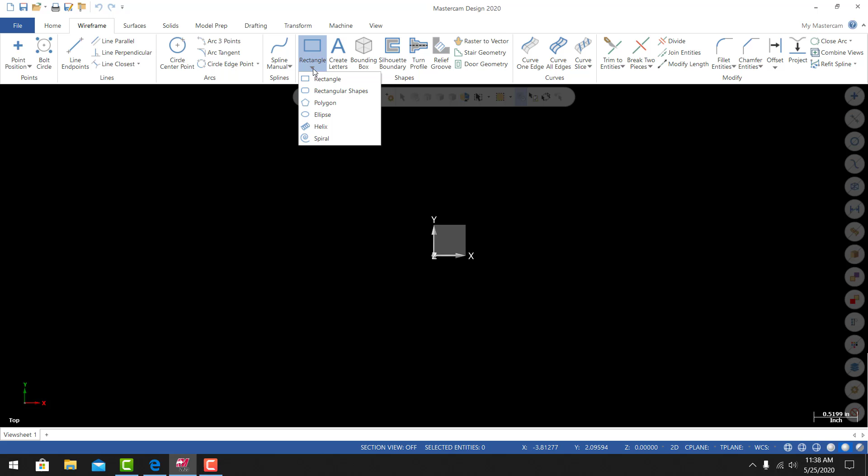I have a blank session of Mastercam opened up on my screen. We're going to create a basic shape that represents the outside profile of our part. If you look at the part, it has a rectangular shape that measures 6 inches by 1.88 inches. I'll start by creating a rectangular shape. So inside of Mastercam, I'll go to the wireframe tab. Under the rectangle tool, you'll find rectangular shapes.

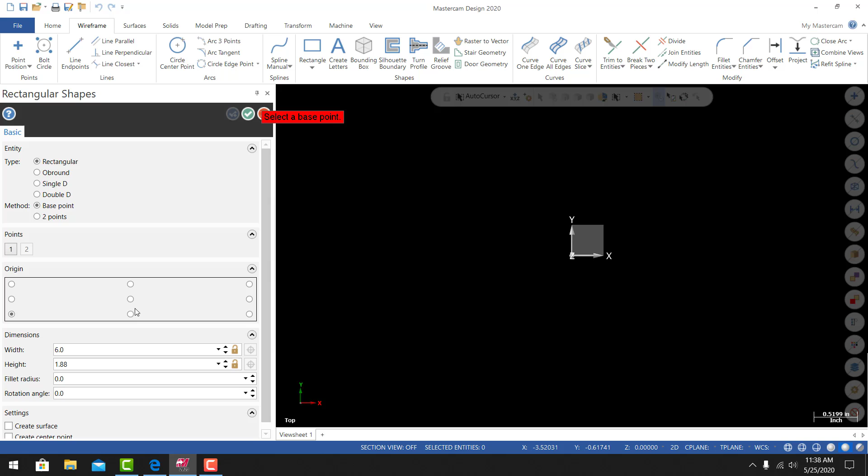For the width, I'll enter 6 inches. For the height, 1.88 inches. And I want the origin of the rectangle to be in the center. If I move my cursor to the graphics area, you'll see a preview of that rectangular shape on your screen. From here, I'll let my cursor lock on to the origin. Once I see it lock on, left click.

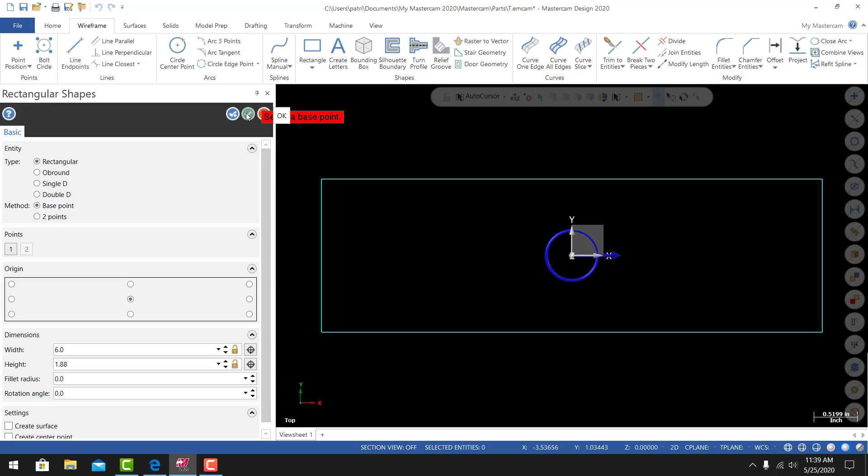You can see that the rectangle has been placed. This will be the only rectangle that I create using this tool. So from here, I'll go to the OK icon, select OK, and that finalizes the creation of the rectangular shape. From here, I'm going to draw in circles that represent the drilled and counterbored holes.

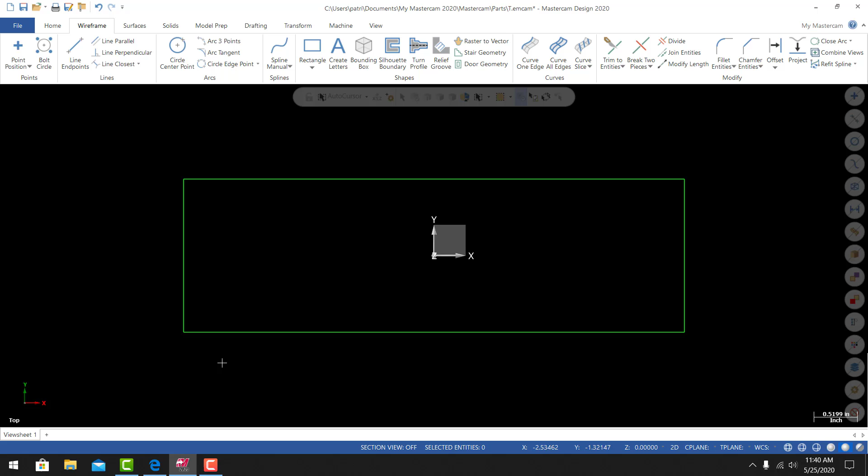To do that, inside of Mastercam, I'll go to Circle Center Point. It's asking me to enter the center point. Before I do that, I'll come over to the size field. In the diameter field, I'll type in 17 divided by 32, 17/32. To position this circle relative to the lower left corner, I will hold my Shift key down, position my cursor next to the lower left corner. Once I see it lock onto it, left click. You'll see axis controls appear on your screen.

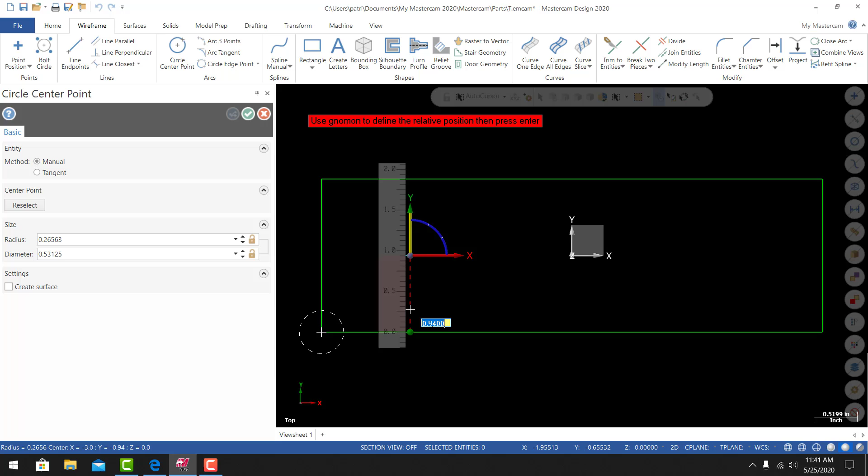To position it along the X-axis, I will hover over the X-axis control. You will see it highlight, and a field will pop up next to it. Here I'll type in 1.063. I hit enter once. I hit enter a second time. I can now hover over the Y-axis control. Once I see the field appear next to the cursor, I'll type in 0.94. Enter once, enter twice, and if I hit enter a third time, you will see that circle appear on my screen.

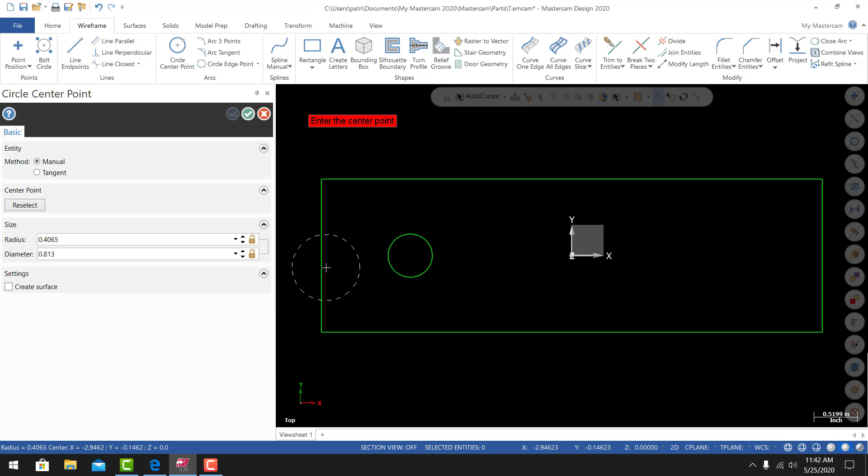From here, I want to create an additional circle. Before I do that, I need to finalize the creation of this circle. Come up to the OK and create new operation icon, left click. I can now come down to the diameter field and type in the diameter of the counterbore. 0.813. Hit enter. I'll move my cursor back to the graphics area. You'll see a preview of that circle. At this time, I can lock my cursor onto the center of the existing hole. To finalize the creation of that circle and to exit the tool, I'll select OK and create new operation.

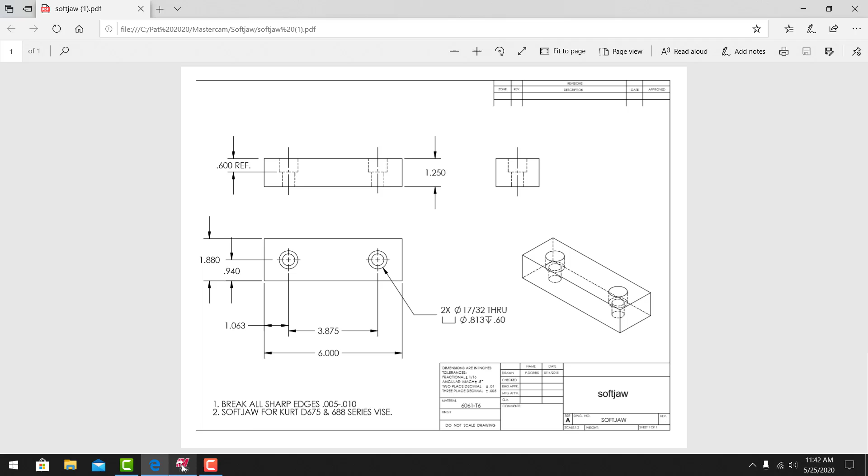To create the second instance of the drilled and counterbored hole, let's reference the drawing. The distance from center to center is 3.875. So back in Mastercam, I'm going to use the Transform Translate tool. Mastercam is prompting me to select the items that I would like to translate. I'll select the two circles. Once they are selected, select End Selection.

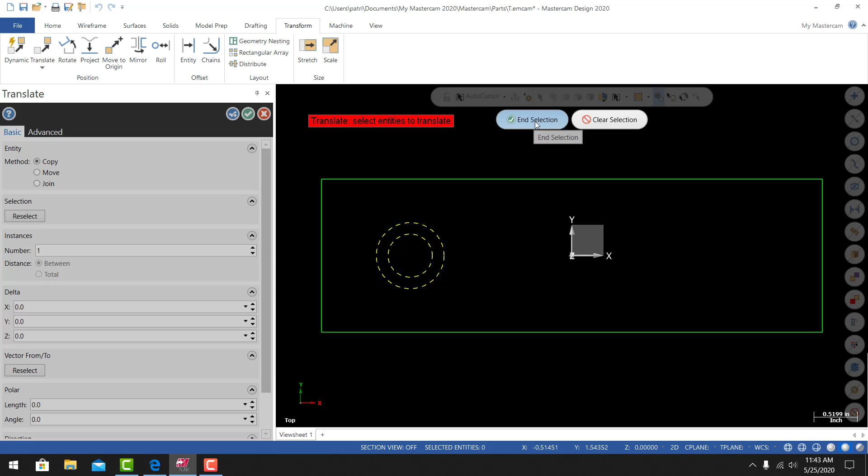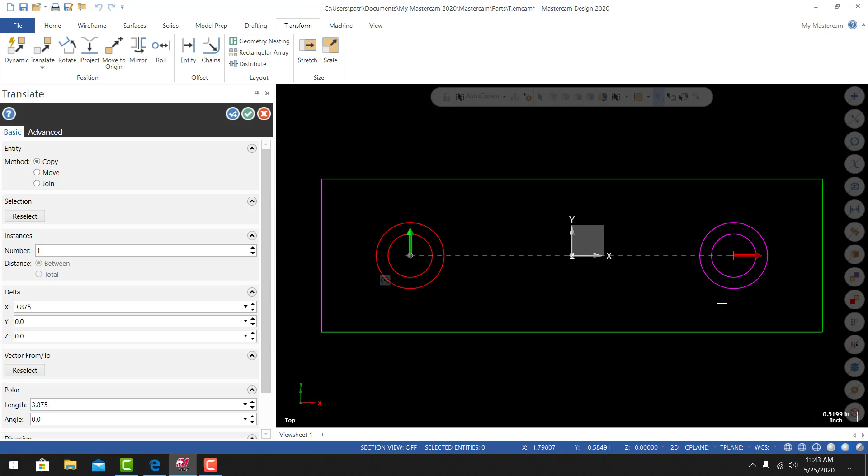In the Translate parameters, in the X field, I'll type in 3.875. I hit Enter. I'm using the copy method. I can see the original and the copied instance of the drilled and counterbored hole. From here, I can select OK. Mastercam has assigned temporary colors to the original and the result of this transformation. To clear those colors, I can right click on my screen and then select the clear colors icon.